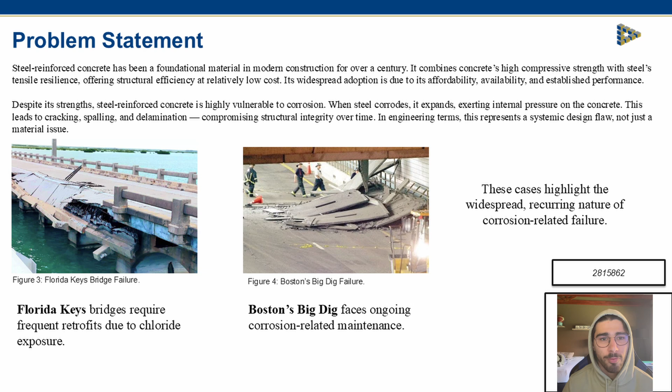Steel reinforced concrete has long been the cornerstone of modern infrastructure, a material marriage that leverages concrete's formidable compressive strength with the tensile resilience of steel. It's affordable, widely available, and easy to work with, but despite more than a century of use, one fundamental flaw remains. Steel corrodes, and when it does, it doesn't just weaken, it expands.

That expansion exerts internal stresses on the surrounding concrete, leading to cracking, spalling, and ultimately structural failure. In engineering terms, it's not just a material flaw, it's a systemic design vulnerability. This isn't a theoretical concern. We've seen it in the Florida Keys and in Boston's Big Dig. These failures are not isolated, they're endemic, and the cost isn't just financial. Every crack is a compromise, every repair is a risk, every failure is a warning.

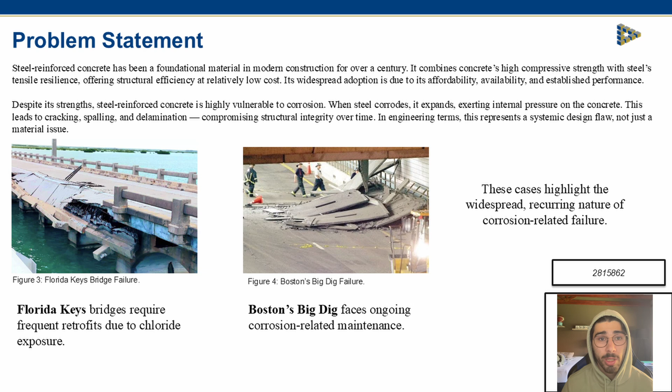In response to this challenge, several alternative reinforcement strategies were investigated, including stainless steel, basalt fiber polymers, geopolymer concrete, and carbon concrete. After a critical comparison of the material properties, durability, environmental impact, and life cycle cost, carbon concrete was selected as the focus of the study.

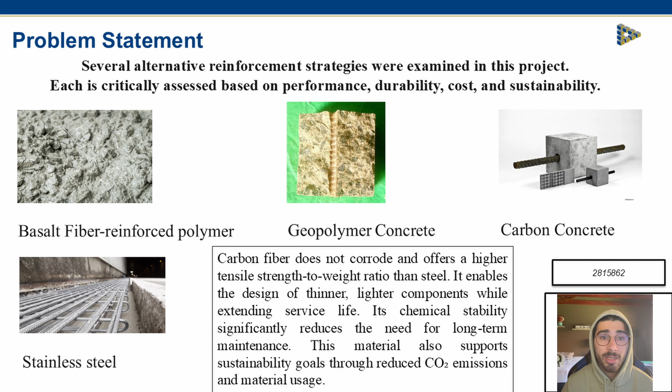This investigation aims to assess the performance limitations of steel reinforced concrete by analyzing common failure mechanisms using principles of material science and engineering. The project will evaluate mechanical properties, durability, cost, and environmental impact of current and alternative systems.

The redesigned solution must offer improved resistance to corrosion and long-term environmental degradation, while maintaining or exceeding the structural integrity of conventional reinforced concrete. It should lower the embodied carbon, extend service life, and reduce maintenance requirements. Furthermore, the proposed system must be cost-effective over its full life cycle and compatible with current and emerging construction methods.

By adopting a material-driven redesign strategy, this project aims to improve the reliability, sustainability, and long-term economic viability of reinforced concrete systems operating in aggressive environmental conditions.

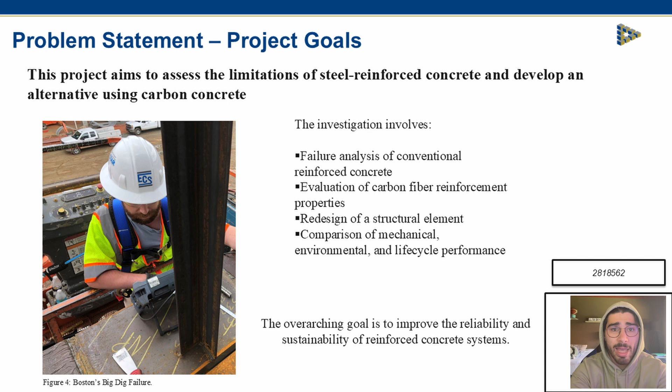Basalt fiber reinforced polymer rods have been engineered as a concrete reinforcement to replace steel due to steel's highly corrosive nature. To protect the steel, extra concrete is poured to ensure air and water don't interact with it. However, this can become expensive and isn't environmentally friendly.

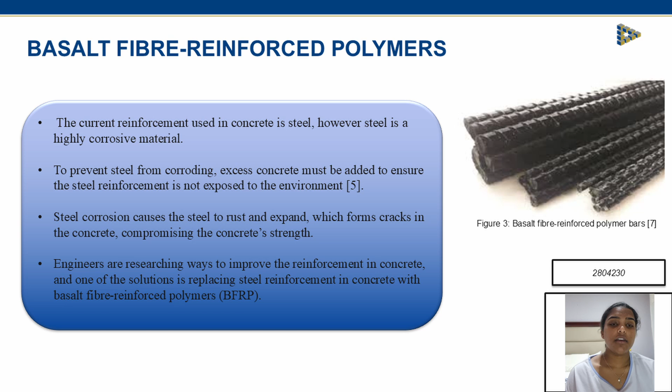Basalt fibers are made from basalt rock, which is a type of volcanic rock formed when lava cools. These fibers are combined with polymer matrix composites to reinforce the fibers. Basalt volcanic rocks are natural and plentiful, therefore basalt fibers are relatively inexpensive to manufacture and are environmentally friendly. The basalt rods are non-corrosive. This solves the issues related with steel-reinforced concrete, such as cracking due to rust expansion and excess concrete being poured.

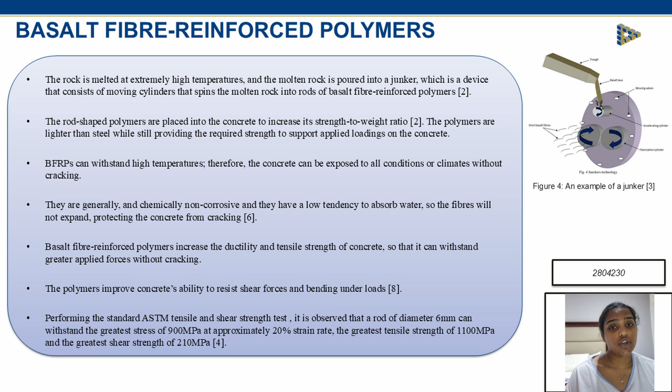However, there are drawbacks when considering basalt rods as a solution to concrete reinforcement. One of the disadvantages is that as the number of rods increases, the number of spaces in the concrete increases too, leaving room for water to collect. When the water freezes, the water expands, causing cracks to form in the concrete. All the disadvantages must be considered before replacing steel reinforcement in concrete with basalt fiber reinforced polymer rods.

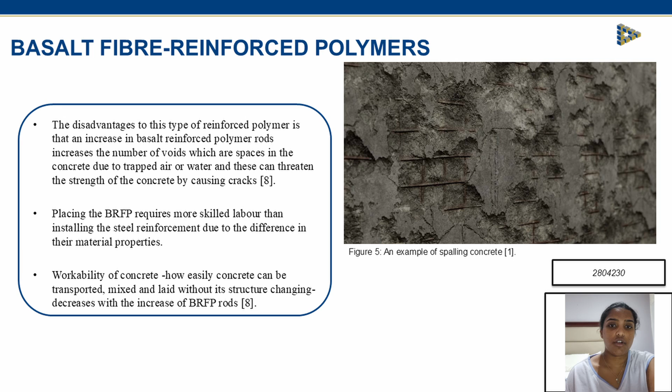Geopolymer concrete is a promising alternative to regular concrete that replaces typical cement with aluminosilicate-rich industrial byproducts such as fly ash or ground-granulated blast furnace slag. Traditional concrete makes use of Portland cement, which contributes to the rising CO2 emissions. It is susceptible to cracking due to shrinking of the material during the curing process. It has an extremely low tensile strength of just 15% of its compressive strength, and it makes use of steel reinforcements, which degrade very easily.

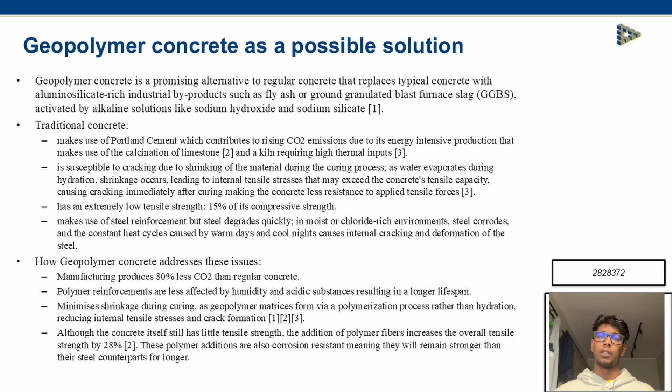Geopolymer concrete addresses these issues. The manufacturing process produces 80% less carbon dioxide. Polymer reinforcements are less affected by humidity and acidity. The minimal shrinkage during curing allows for a stronger, more versatile structure. And the concrete itself has little tensile strength, but the addition of simple carbon polymer can increase the tensile strength by up to 28%.

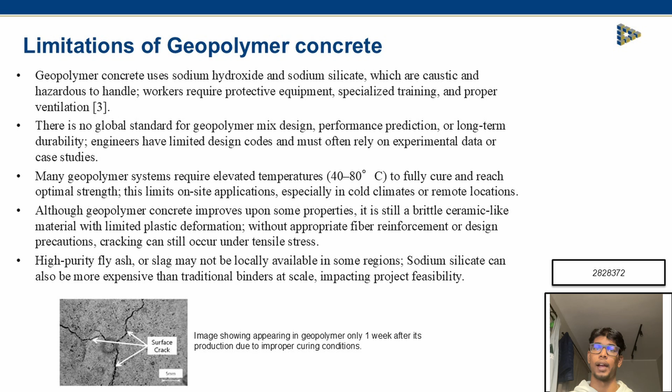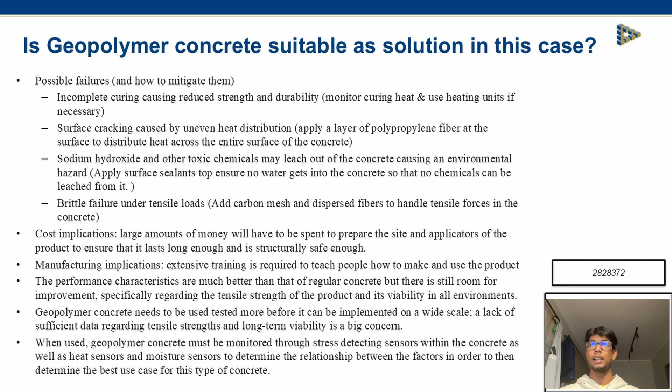As per its limitations, geopolymer concrete is manufactured using substances which are classed as both hazardous and caustic. Additionally, there are no global standards to determine how the substance should be mixed, and many geopolymer substances require elevated and exact temperatures which are not achievable in nature. Unfortunately, geopolymer concrete is not a valid solution in this case due to the negative cost and manufacturing implications. Additionally, there is not enough data to back the durability regarding this product.

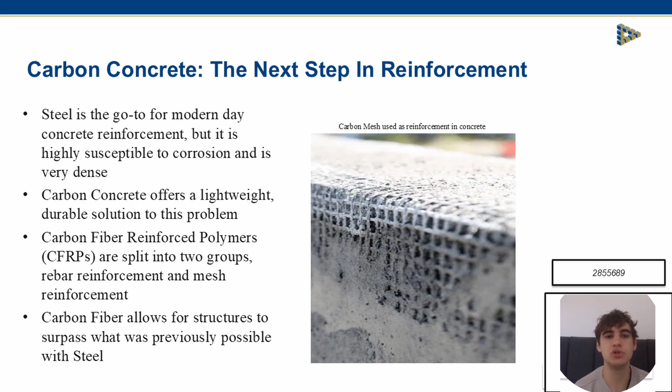While steel is primarily used to reinforce concrete, it has some severe drawbacks, like its susceptibility to corrosion and its high density. Carbon concrete seeks to not only succeed where steel reinforcements fail, but to surpass them and open up new avenues for what is possible in construction and civil engineering. When talking about carbon concrete, what is really meant is a fine concrete mix reinforced with carbon fiber structures. These structures are made from carbon fiber reinforced composite polymers, which are then shaped into two main support structures for carbon concrete, traditional rebar and carbon fiber meshing.

The CFRP reinforcements are traditionally made from a synthetic polymer called polyacrylonitrile, or PAN, which is then placed within a high temperature environment to rearrange the carbon structures to get traditional carbon fiber. As one can imagine, this is an expensive process, but the production of carbon fibers is being dramatically changed with the introduction of lignin, an organic carbon polymer chain used to provide rigidity to cell walls within trees. Lignin is very readily available as it is one of the most common byproducts when it comes to the paper pulping process.

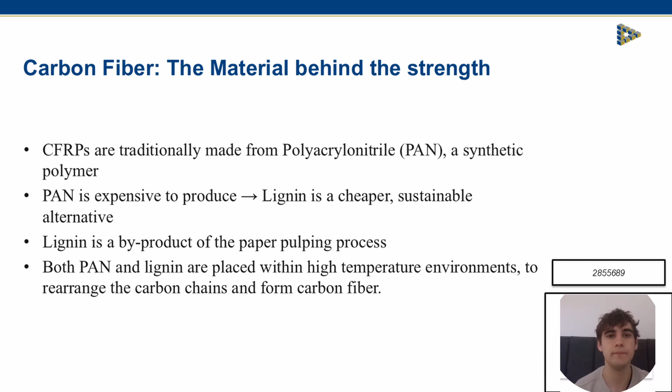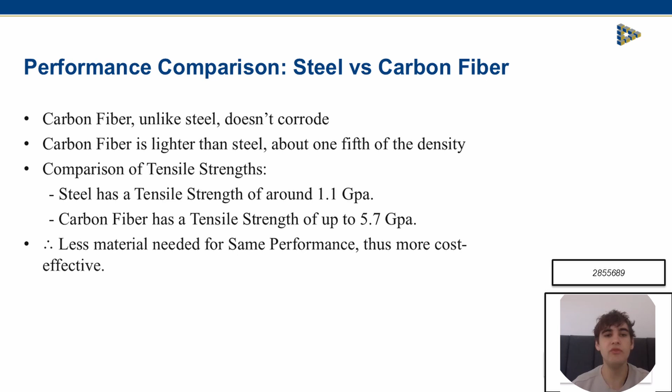Why use carbon fiber? To understand why carbon fiber is a strong alternative to steel reinforcement, we need to compare their performances. Steel needs to be encased to prolong the time before corrosion sets in, and also needs more concrete to support its weight. On the other hand, carbon fiber doesn't corrode, is a fifth as dense, and has a tensile strength of around 5.7 gigapascals, over 5 times that of steel's 1.1 gigapascals. This allows for lighter designs using less material overall. Carbon fiber reinforced concrete is still in the early stages of development, but with its production becoming more and more cost efficient, combined with its amazing physical properties, carbon fiber is rapidly becoming the best solution for concrete reinforcement.

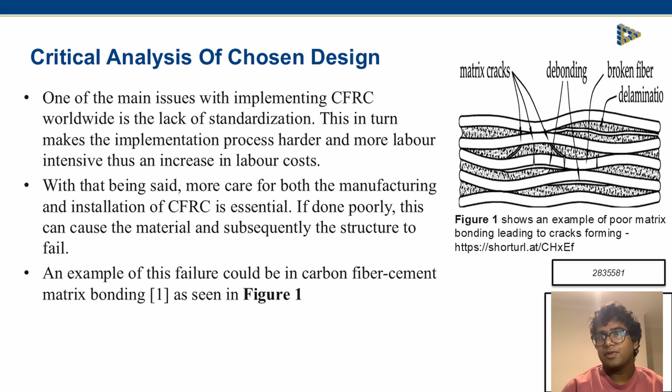One of the main issues with implementing CFRC worldwide is the lack of standardization. This in turn makes the construction process harder and more labor-intensive, thus an increase in labor costs. With that being said, more care for both the manufacturing and installation of CFRC is essential. If done poorly, this can lead to the material and subsequently the structure to fail. An example of this failure could be in carbon fiber cement matrix bonding. When the surface of carbon fiber is smooth, it can lead to poor bonding with the cement matrix and thus leads to cracks forming, which allows for crack propagation to take place. Also, poor bonding can lead to poor stress transfers between the layers.

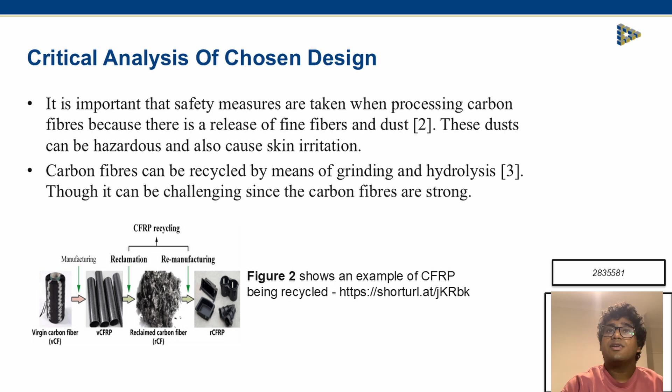It is important that safety measures are taken when processing carbon fibers because they release fine fibers and dust. These dusts can be hazardous and also cause skin irritation. Carbon fibers can be recycled by means of grinding, though it can be challenging since fibers are strong. Figure 2 shows how carbon fibers can be recycled and reused. Another application of this recycled carbon fiber is in concrete. The recycled carbon fiber increases fracture toughness of the cement.

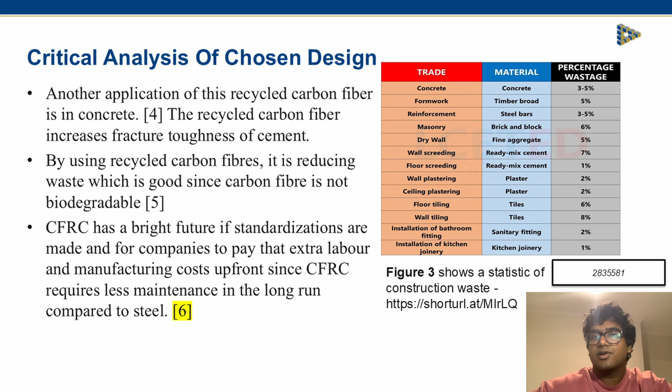By using recycled carbon fibers, it is reducing waste, which is good, since carbon fiber is not biodegradable. As seen in Figure 3, steel waste makes up a big portion of construction waste, and by using this recyclable carbon fiber, we can greatly reduce this percentage. CFRC has a bright future if standardizations are made and companies pay the extra labor and manufacturing costs upfront, since CFRC requires less maintenance in the long run compared to steel.